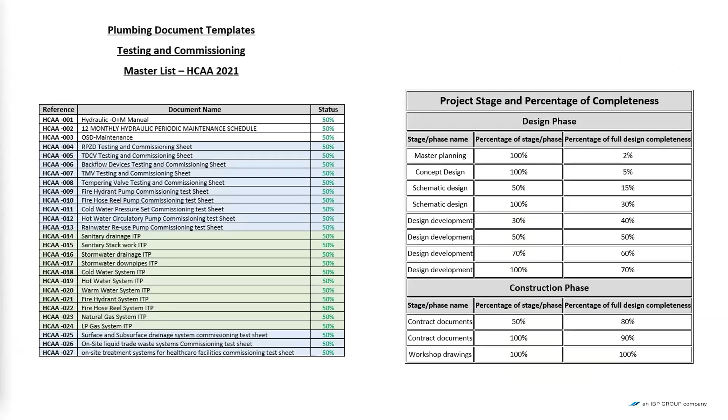We've got our advisory notes that were meant to go out a few weeks ago. We're still making some finishing touches to those, but our big one is the clear outs in apartments, which has been an issue for a lot of different class 2 jobs out there. That's the list of the testing and commissioning documents, and that's a bit of a snapshot for you of what's on the website now.

A reminder of our CPD. Most people know, but you need to have 25 points a year now to maintain your accreditation with the New South Wales government. Attending tonight, you get 2 points. Attending a CPD session on a Tuesday, you get 1 point for the hour, and you can get points for subscribing to the Plumbing Connection. There's a whole series of different ways of getting it, but you have to lodge those points on our website to get them. Other than for tonight's meeting, they automatically get credited to your name by Emily.

Matt Lloyd, are you here tonight, Matt? He is? Over here. Okay, so yeah, we've done a bit of a plug here for Matt.

He's moved from Geberit after 8 years across to Rehau. Just a reminder to anyone else that moves around or has new staff, let us know, and we're happy to introduce them to the room. Matt's obviously been a big player in this space for many years, and he's very much appreciated. If you need Matt's number, it's actually changed - he didn't take his Geberit number with him, he's left that, and he's got a new Rehau number that you can get off him tonight.

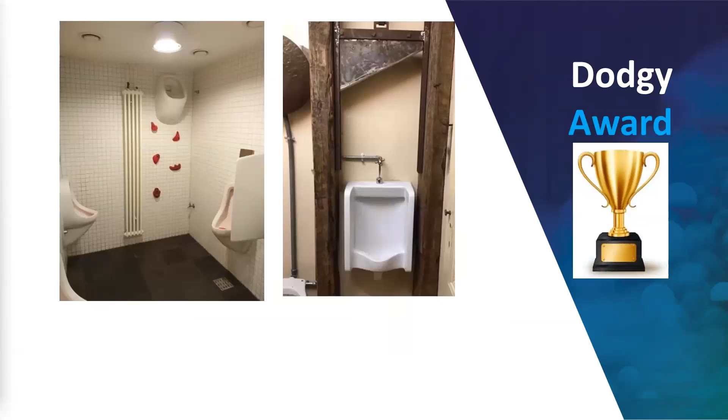So tonight's Dodgy Award goes to Paul Angus for the guillotine urinal and the rock climbing urinal. So Paul, if you want to come out and accept your bottle of wine. You want white or red?

Red. So the dodgy photos have been getting light on, so start sending them through again so we can get some good photos going. We have had some really good ones in the past, and they're good as well - not actually really dodgy, some good stuff. You guys are welcome to send them too. If you see dodgy stuff, flick them in. Just don't tell us who the plumber is.

Okay, so Dave Sablina, I might get you up. I touched on this last meeting, but after 6 years I think in the president role, and now running my own business, I've decided to hand over the baton. I'll be staying on as a director, but we've got someone new, so thanks, Dave.

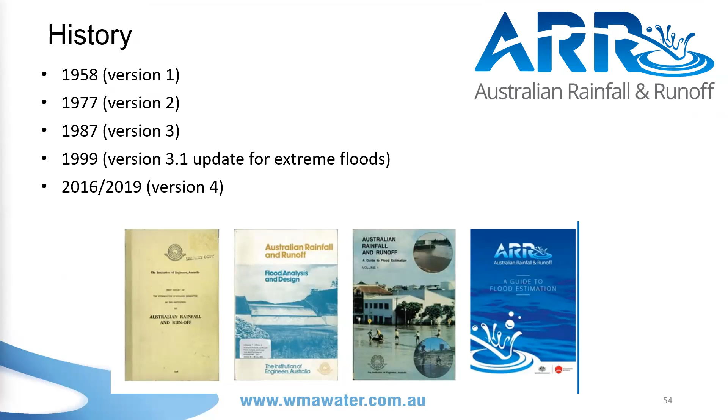It's been going for a very long time, and we updated it in 2016. The previous version was 30 years earlier, and computers were sort of invented and made public in that period. So the leap was a bit of a quantum leap, because we moved from hand calculations. People were doing this in the 50s, and you probably don't need to worry too much about this slide.

Big changes in practice. A lot of stuff changed, but a couple of things stand out. The rainfalls have been significantly updated for climate change. Now, climate change probably hasn't hit your industry yet, but don't worry, it will if you're designing things like roof gutters and other bits and pieces. I wouldn't be surprised if it becomes mandated out of the flood inquiry into the flooding up at Lismore and Woodburn and other places. So that might change a few things, and it'll probably be a bit brutal when it happens.

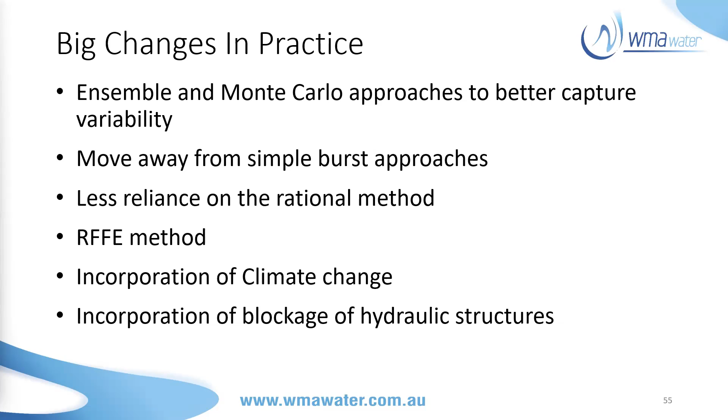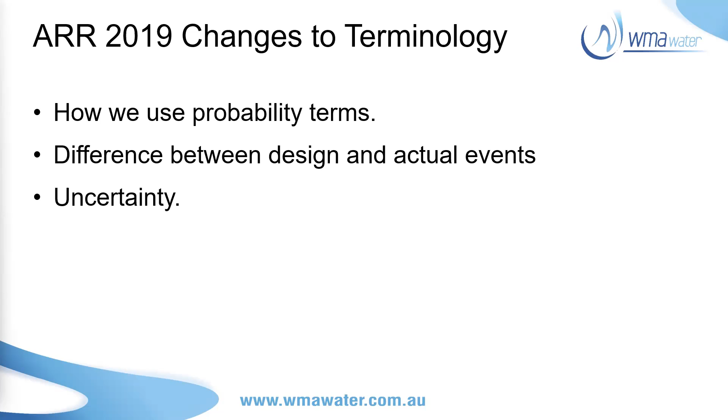One of the other things we changed is probability terms, which is why I guess I'm being invited here. This is an old long-term argument—they were arguing about it in 1987 when I was finishing university and they were writing the previous version. We're also trying to deal with things like uncertainty.

So, probability. People here, I presume, have heard the term ARI, average recurrence interval. Well, I'm sorry, we're going to put that in the bin tonight, and I'm going to hopefully explain why. I'll let you all talk about it amongst yourselves in your industry, but if you talk to other people, I'd really prefer you didn't use that terminology. Hopefully by the end of tonight, you'll believe me.

When we talk about probability, it's all about communicating the risk and what could happen to the public, to politicians—because they're not as smart as the public—and often to decision makers who need things compressed into a pretty small, short format. We want people to understand risk.

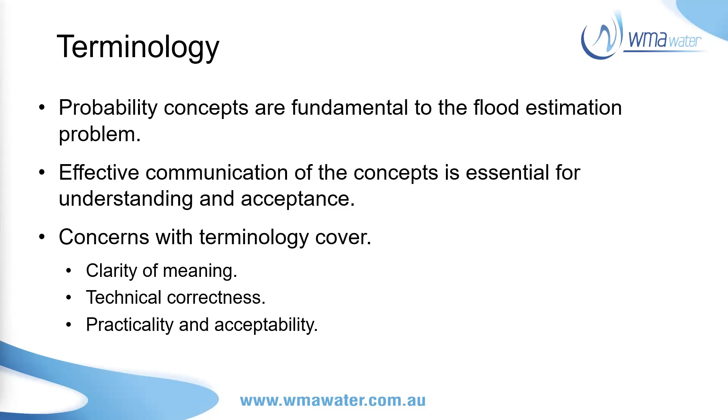The problem is, as people, in terms of managing risk—particularly rare risks—we want to make sure we get paid on a Friday, or we get dinner tonight, or we've got somewhere to go home to live. We're not real good at thinking about what's going to happen in a 1 in 100 year, or 1%, flood—or up at Lismore, it's about a 1 in 500, when water's two stories up in people's houses. People need to understand that.

So in terms of clarity of meaning, which was a big focus, the terms recurrence interval and return period—like a flood has a 10-year return period or a 100-year return period—are really complicated. It's misused, and the media love it, but it doesn't really convey too much about the probability.

Floods and rainfalls—even 5-minute rainfalls or 1-minute rainfalls that would affect a gutter—occur relatively randomly. But what you might have noticed this year, if you've been trying to mow your lawn like me, is that floods and heavy rainfalls are clustered. We go through these periods. This has been a tough year for rainfall, not as tough as other years though—like some years in the 50s, there might be a few people who were born then and might remember it. 74 was pretty bad too. Despite what was on the media, there have been worse years in terms of rainfall.

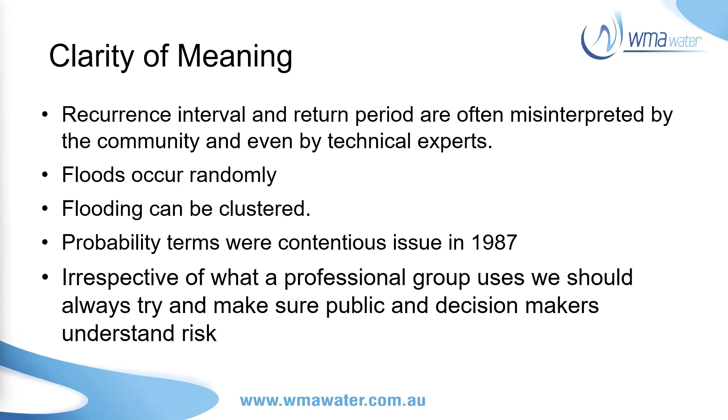But probability has been a contentious issue. Irrespective of what your professional group uses, we really try to make sure that when you communicate these things to the public, you help them understand the risk.

So what we've used in the past, most of the time, is what we call average recurrence interval—that's how long on average, and you need to emphasize 'average', before that happens again. Unfortunately, the average is the important part, and the recurrence interval is the easy part.

These averages are not representative. They work all right in Sydney, but if you're in Brisbane, they don't work at all—particularly if you're looking at something that happens every 3 months. If it's something that happens every 2 years, that's not too bad, but 3 months doesn't work in Brisbane, doesn't work in Melbourne, and sort of works a bit in Sydney.

And it's always misunderstood for large floods as well, or large rainfall events. We had some really big rainfall events in New Zealand, in Auckland, that flooded a huge number of houses. Somebody wrote into the local paper and said, 'We've had a 100-year flood. The best thing the government can do is let people build in the floodplain, build new houses and stimulate the economy, because we won't have another flood for 100 years, and those houses will be worn out by the time the next flood occurs.'

So you can see my point—average recurrence interval doesn't work terribly well if people are going to make decisions on that basis, thinking 'we've had one, we're safe for 100 years.' Well, it actually doesn't work like that at all.

Each year, there's a 1 in 100 chance it'll happen again. Some people win lotto twice. I don't play lotto because I wouldn't win anyway, but most people lose and don't win lotto. So each year you've got a 1 in 100-year chance of something occurring, and that is very different. You roll a dice, you could be lucky, and might not be each year.

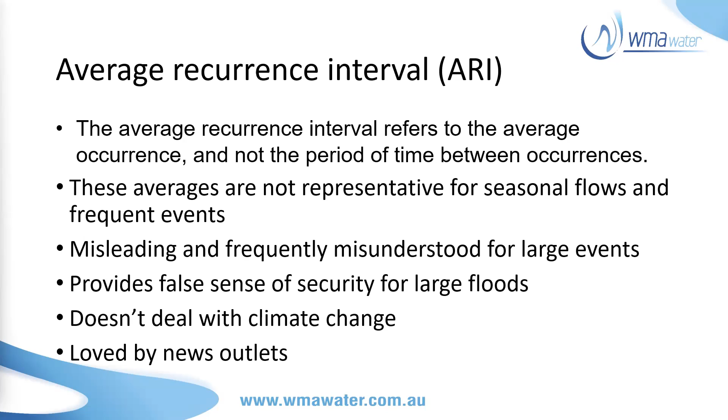So ARI doesn't work very well for a couple of reasons. Annual exceedance probability doesn't flow off the tongue so well, it's not quite so easy. But from a pure statistical term, it's so much easier for us to calculate. And it's really about annualized risk.

So if someone says, what does it mean? It's about betting on a horse race each year. Am I going to win with my 100 to 1 long shot? Or in this case, you wouldn't win, you'd lose because your house might get flooded. Or am I going to not? And so that's how flooding really does work.

It's an annualized risk. And like we've had a big rainfall event in Western Sydney - well, not really big, about 1 in 15, 1 in 20 years at Windsor. I can tell you, if we have a flood now, we've got about a 1 in 4 chance of having another flood as big between now and August because of the way rainfall works.

You can express it as chance per year. You have a 1 in 100 chance per year of this event occurring. And next year, it resets, you're back again, you have another 1 in 100-year chance. You're not safe for 100 years. You can't build houses on the floodplain and hope it's not going to happen for 100 years. It doesn't work like that.

So we've changed that, and I got a lot of grief from my profession, so maybe some of you can add to that. But I'm hoping what I've said makes a little bit of sense, but maybe not if you're looking quite vague.

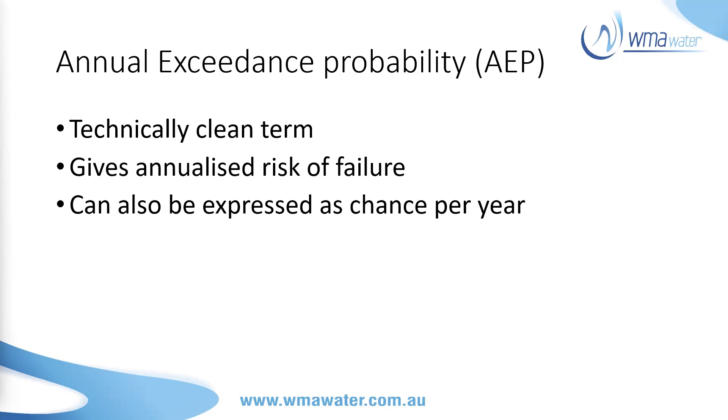So the other thing we've done is for frequent rainfalls, and I presume people use that for other things in your profession, in your groups, like something that happens every 3 months or once a year. So we've changed a few things too. We don't use a 1 year, something that happens every 1 year or every 3 months. If it's 3 months, we'd use the term you get 4 exceedances per year on average, not one every 3 months. And we're going, why are you doing that?

It's because of seasonality. If you design something for a rainfall that occurs every 3 months, I can tell you if you're in Sydney, Melbourne or Brisbane, like something that takes 5 minutes of rainfall to overflow, they'll all happen in summer. They won't happen in winter. Well, some will, but basically bugger all. So it happens every 3 months, but most of them will be in the warm 6 months and none of them basically will be in the cold 6 months. So it's not really 3 months apart. It's like you get 4 a year.

How far apart they are is just an average. It's not what happens. Now, I've probably confused a few of you, but I've got a picture here.

Well, people in my profession are smart, so we've just put a table up, and one of my colleagues at the Bureau calls it the Rosetta Stone. It's in Australian Rainfall and Runoff. And I should say, Australian Rainfall and Runoff is free. You can download it, cut anything out of it, use it, put it in any of your industry documents, do anything you like with it, as long as you say where you nicked it from.

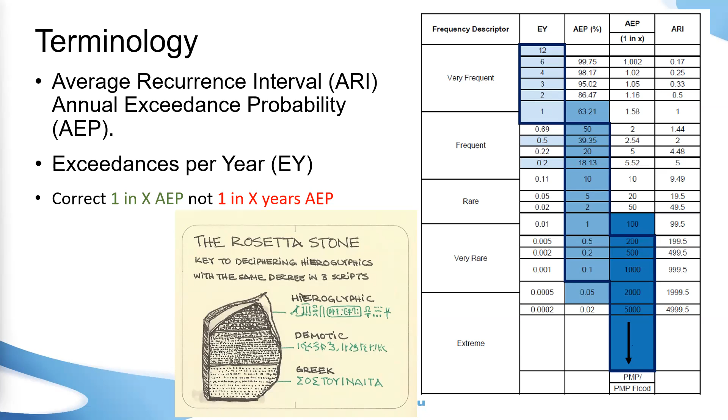Now, in terms of rainfall, for people who are sort of my age or a little bit older, if you're using the old rainfall from the Bureau, when doing things like gutters, that was calculated in 1987. And if you're looking at, say, a 5-minute rainfall or a 6-minute rainfall, back in 1987, we had 14 long-term rain gauges in the whole country, just 14. We had 1 in Sydney and 1 in Newcastle and 1 in Brisbane and 1 in Cairns.

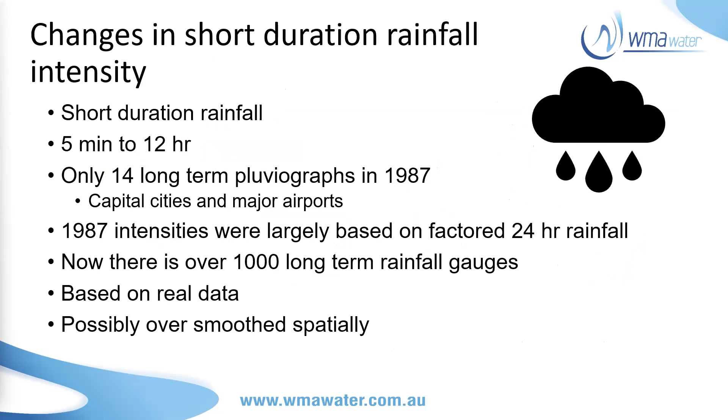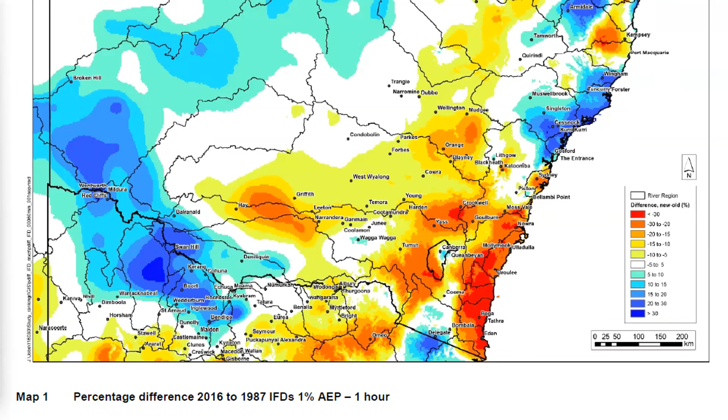You'll see a very similar graph if you looked at 5 minutes. The reason it went red down on the south coast is we didn't have any rain gauges down there, so they just assumed what was happening in Sydney would happen there, and extrapolated all the way down to Victoria.

Now, long-term rainfalls - is that an issue for your practice area? Probably not, they didn't change very much, so we can probably skip that.

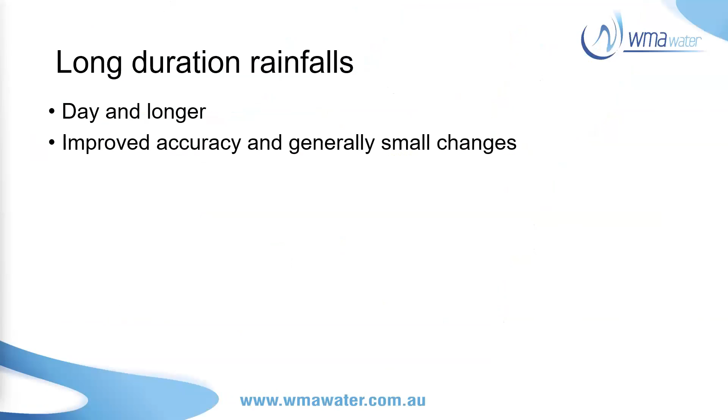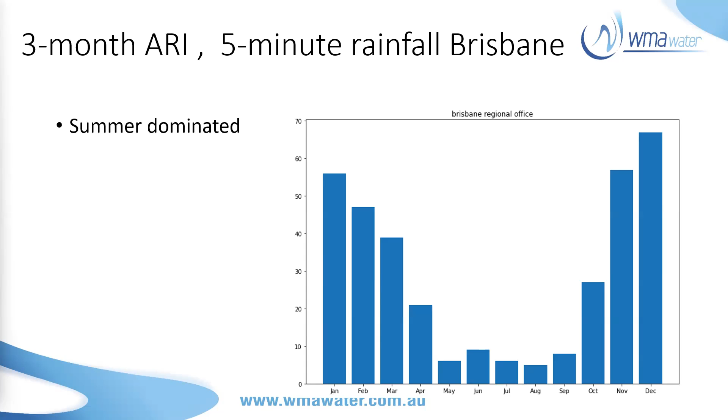We can look at what happened in the wettest year - we didn't get 4 of them every year. This year we got about 9, another year we got 1. So the average is really important - that alone isn't telling you too much.

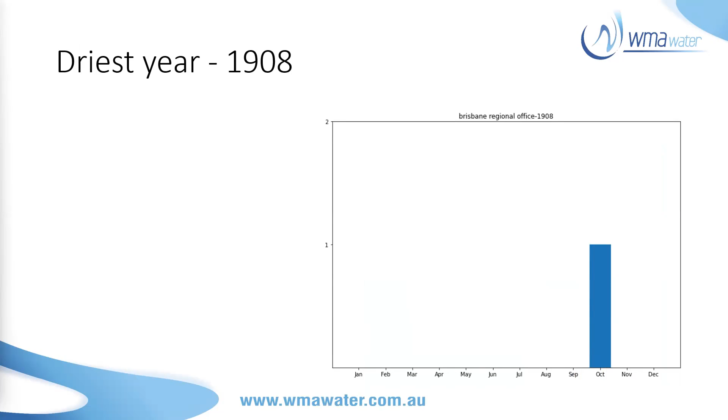In fact, if we look at the time between events, the only interval that's wrong is 3 months. You're more likely to get them at about a month or about 6 months, because you'll probably get 3 or 4 in summer and none in winter. So average recurrence interval is telling you absolutely nothing about the time between events.

Have I lost people on that? No? Nick's looking a bit confused - I might have to quiz him later.

This shows how many events occurred in different years, going back to 1907 to around now. You can see some years had 1, some had 2, some years had 9.

This is how many events you get in a year - some years had 1, some had 2, some had 3. But events per year, you typically get on average 4 a year. So we've replaced ARI, average recurrence interval, with the reverse of that, which is events per year. You normally get 4, but you can see other amounts occur too.

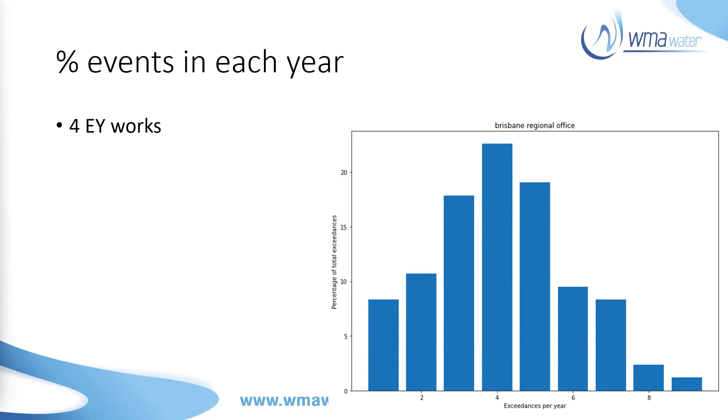And you get the same thing with a 2-year event. But if you're just dealing with a 1 in 100, or a 1% AEP - annual exceedance probability - then it's exactly the same as a 100-year ARI. Just don't tell the media that, because they drive us mad.

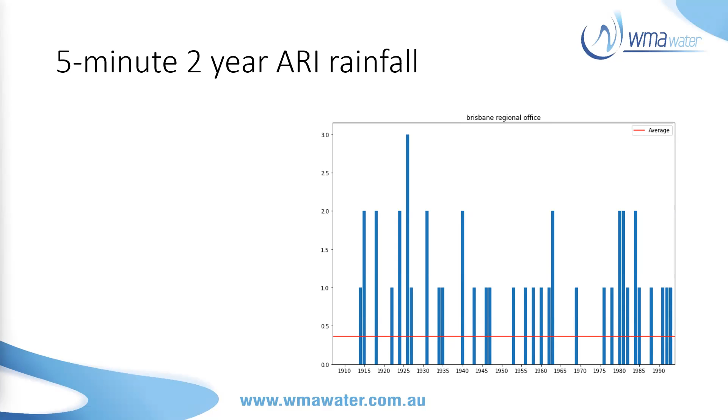In terms of climate change, a lot of people say, I don't believe it, it's not real. In 1987, before I'd even graduated uni, Australian Rainfall and Runoff acknowledged that people were starting to really worry in the meteorological and flood space about climate change and how it would affect our climate. So it's not something that's new.

This time around, we provide some guidance based on a working group with CSIRO, the Bureau, and a couple of universities. What happens with climate change? We're heating the world up. If the atmosphere is warmer, it can hold more moisture, so you can get more rain. That part's pretty simple - when you try to go any further, it goes from very simple to very, very complicated.

But basically, a warmer climate will mean that short duration events, like 5 minutes, will get heavier. And that is what we're seeing in this country.

The other thing we're seeing is that not only will rainfalls get heavier, the really intense part of storms will get more intense, while the lead-up to the storm - where you just get a little dribble - and the bit after the storm will actually get less. So more rainfall will move to the intense part. If you're designing something that has to take a particular rainfall, it's actually going to get harder.

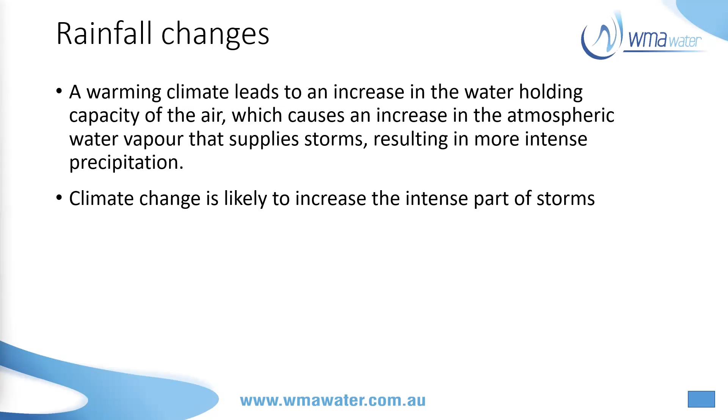In terms of what happens with climate change, we don't know with any great exactness because it's a very complex process, but we've done some work with CSIRO and the Bureau of Meteorology, and we've come up with some percentage increases.

And I don't know if you can read this from down the back, but if we all walk home tonight, we don't catch the car, and you sell your car, or you throw your car away, and you commit to going to net zero about next week, rainfalls by 2090 are going to go up by about 10% anyway.

That's what we call RCP 4.5, representative concentration pathways. So if we stopped making extra CO2 right now, rainfalls are going to go up. If you look at that table, they're going to go up by 4.3% by about 2030, and 2030 is not very far away. So the rainfalls we're using are probably underestimated already because we're in 2022. And if we continue as business as usual, rainfalls are probably going to go up by about 20%. It says 19.7, but it's so inexact, it could be 20, it could be 15, it could be 25.

So these rainfalls that cause havoc, whether it's on a house or a yard or a major river, are going to go up. And the ones that are probably going to go up the most are the ones on a roof or in a backyard because there are no limiting factors. So hopefully I've answered a few questions on rainfall.

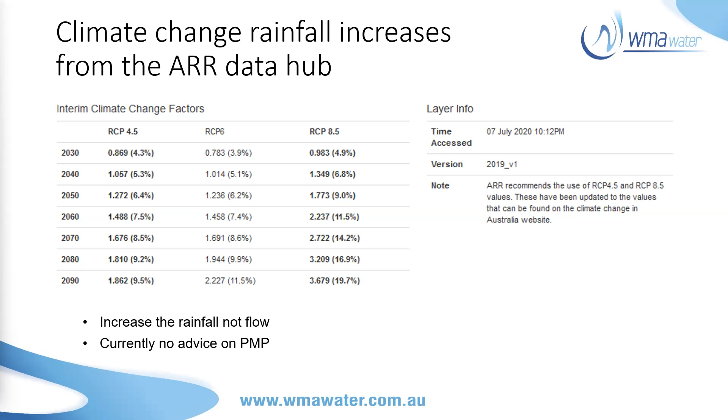Think you're doing this. Yeah. Yeah, the end. Cool, just click that.

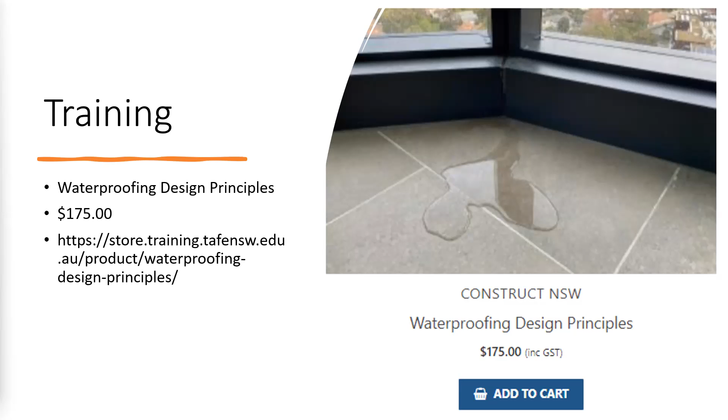Training - there's a really good training course on water shedding put together by Ross Taylor. It's dirt cheap, I'd recommend everybody jump online and buy it for their company or staff, and just run through it, because you'll find that most of the issues when it comes to water shedding - a new term we've come up with, the whole encompassing drainage, waterproofing, and keeping water out of spots it shouldn't get into - training package. So check that out. I've also taken a few slides from it, so you'll hopefully enjoy those. Now, the systemic problem.

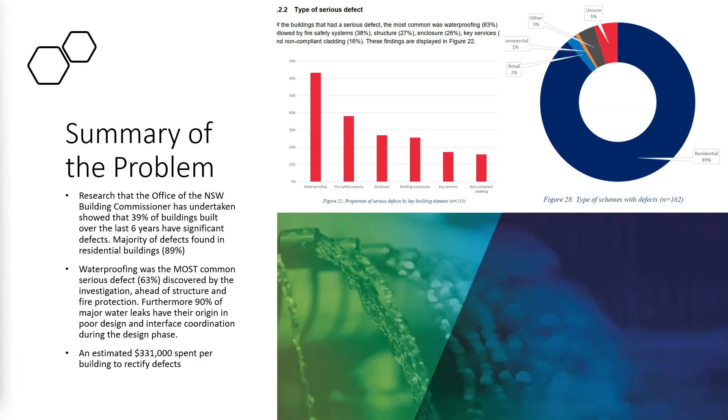We'll start with wet areas. The BCA at the moment talks to floor waste in wet areas. Without picking on the Australian Building Codes Board, there needs to be a little bit of work when it comes to the performance-based requirement and also the deemed to satisfy provision. It doesn't really stipulate any qualifications or metrics that you can measure that against.

Is it the need to drain 2 showers with a single floor waste, or do we need to consider a failed flexi connector in the bathroom? These are some of the discussions we've been having as a working group to determine the viability and reason of having a floor drain within a wet area.

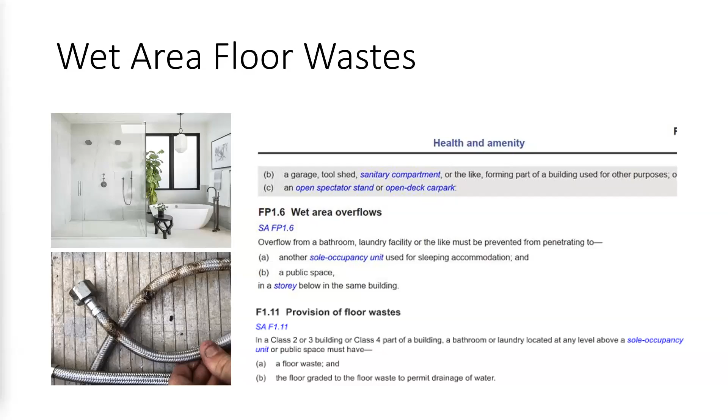Moving on, some of the stuff we've looked at is surface tension, which depends on the roughness of the surface - probably between 2 to 3 millimeters generally. It's quite a factor when it comes to the ability to maintain liquid within a certain enclosed boundary. This is a standard ensuite shower, and I've demonstrated that a standard 1.25% fall sees about 25 millimeters difference between the grate height and the door.

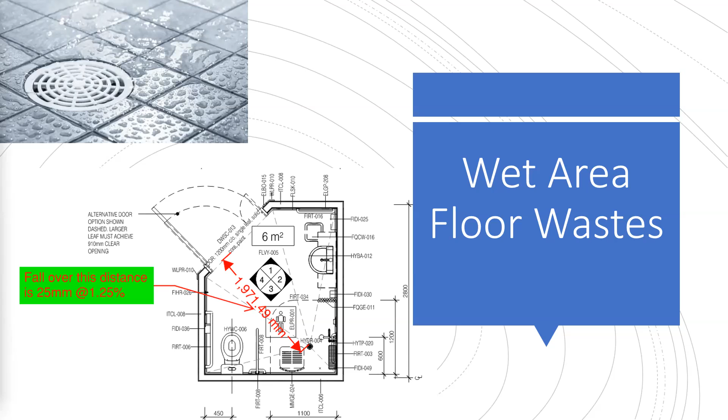We actually exceed the European standard for testing and designing floor waste grates. That would see us with a greater depth than 30 millimeters, which would see water exiting our door at the drop of a hat. So once again, we probably need to think about what we're actually trying to achieve here, how many showers we need to go down the drain.

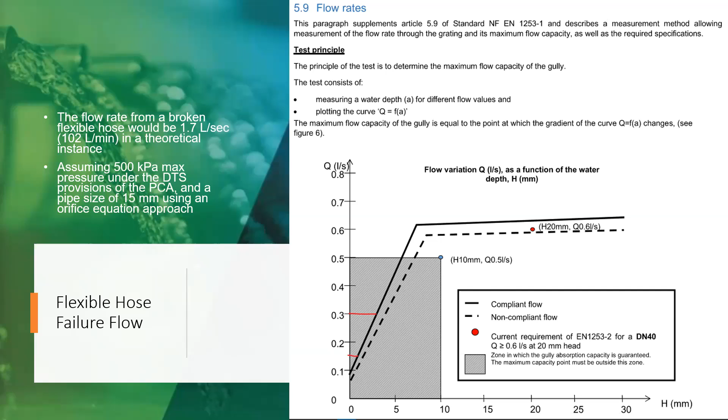In our literature review, we haven't been able to find an Australian standard or guidance that actually tests floor wastes, their grate inlet capacity, and the depth over them, and whether or not that will actually overtop a 900 by 900 millimeter shower. So that's probably out to the jury a little bit at the moment.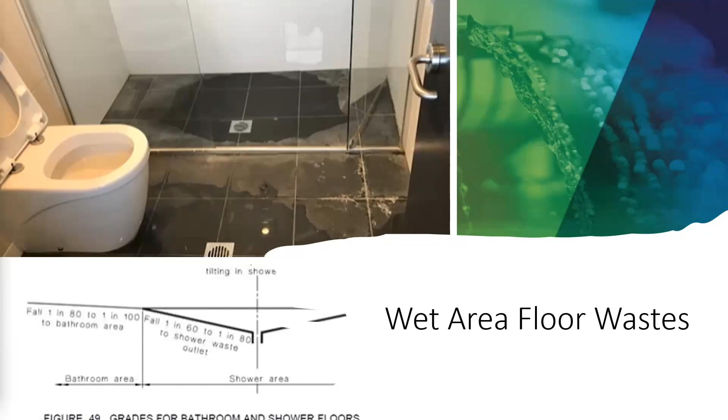It's quite a good example of a situation where somebody thought, oh well, we'll pop the grate close to the door - somebody probably needs to do a bit of cleaning in their bathroom as well. But in this instance, the shower flow was well exceeding the grate capacity, overtopping and using the floor waste within the general wet area quite a bit. So its annual exceedance probability really went over what would reasonably be desired.

There's a little bit of work that might need to be done in this area, which the committee has been producing a guide as to what good looks like. We haven't really stipulated down to the fact that manufacturers probably should start testing in Australia and identifying the depth over their grates that they sell, especially at Bunnings. But I think there needs to be some definition - what should a floor waste do, what shouldn't a floor waste do, and mandate manufacturers to start flow testing.

We need to touch the BCA and update some of their performance-based requirements, and also nominate a practitioner who's going to be responsible for this, because at the moment the floor waste grates are selected generally on look, not necessarily performance - and that's fine so long as the rest of the componentry is designed as such. So the whole intent is to keep the water in the shower, if that's the actual want, and also keep the water in the wet area so as to not breach the performance-based requirement as it is.

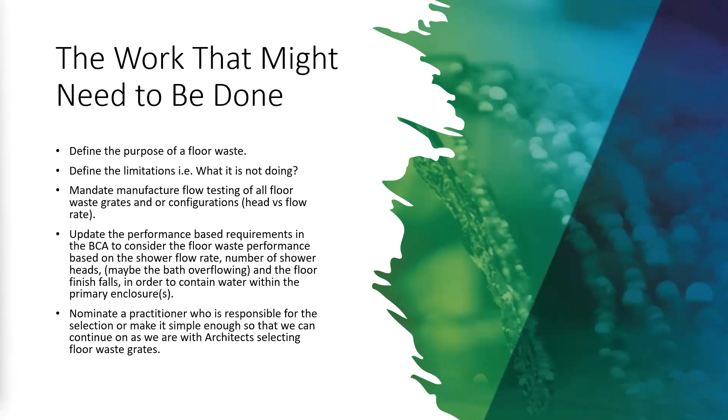We'll move on to rainwater drainage. Rainwater drainage is quite an interesting topic in Class 2 buildings. Balconies are quite a difficult thing to design.

As the BCA moves forward, it's looking at further enabling DDA access, which is a really good move for the industry and people alike. That starts to generate a few problems in the building industry with threshold differences between inside and out, head depths over rainwater outlets, and the like.

Some of the good things the BCA is bringing in is 1.25% falls, or 1 in 80 if you prefer ratios, in structural slabs. That encourages water to move to outlets and takes a realization that a membrane isn't a perfect barrier. A membrane cracks, breaks, and the structure over its 10-year life expectancy moves greater than the membrane's actual tolerance. Getting back to some real basic principles really helps there.

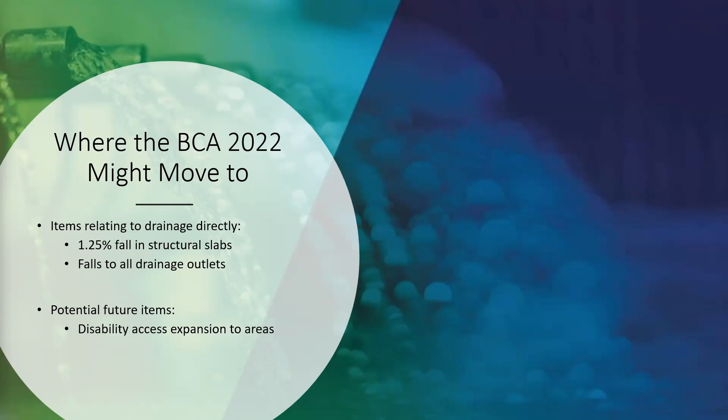Those falls obviously fall to drainage outlets. At the moment, the work we're doing, we're not discriminating between the two, but I think eventually when it filters down to the deemed-to-satisfy provisions, yes, there should be.

At the moment, our BCA as it is really general, which is good because it obviously covers generally every instance. But at the same time, it points us to a deemed-to-satisfy provision that doesn't necessarily satisfy every instance. In the new 2022, under that deemed-to-satisfy provision, there's now a note saying we recognize we don't satisfy every single instance, and if you're sitting outside of those instances, engage somebody to undertake a performance-based solution.

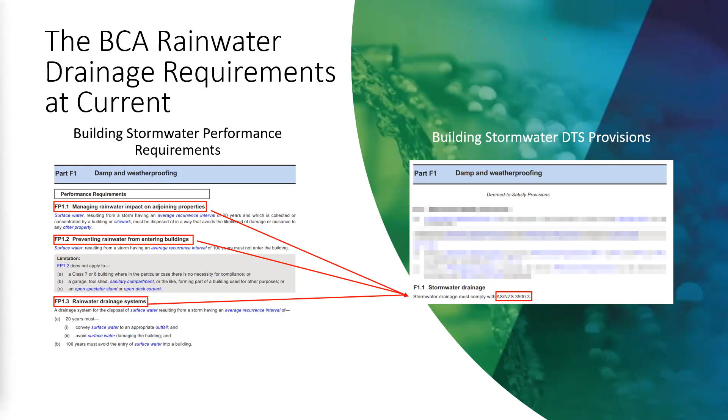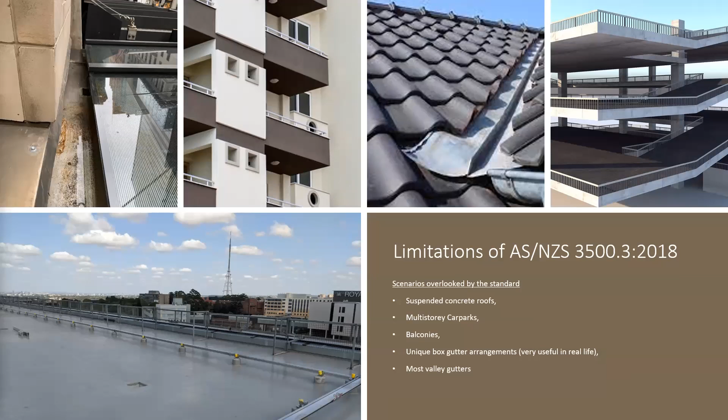Some of the stuff that AS/NZS 3500.3 does do, I won't read those out because we all know what they do, and we might talk about some of the things that they don't do. They don't really do balconies very well, they don't really do concrete roofs very well, very limited when it comes to valley gutters, and they don't really talk about multi-story car parks. I won't go on because I've got a limited amount of time.

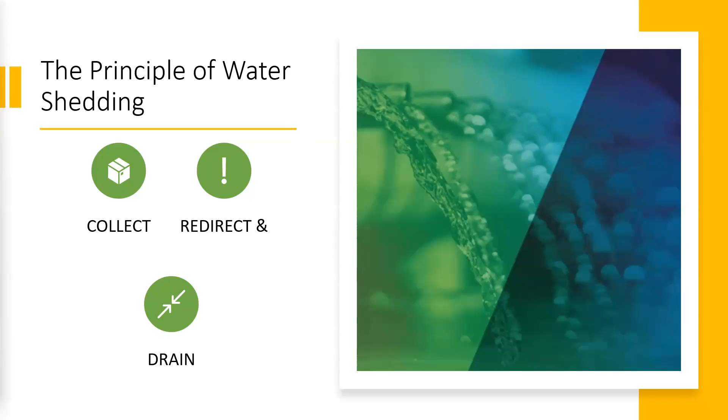The principles of watershedding - this is really what I was supposed to talk about, but I'm going to talk about a lot of other stuff. Realistically, you've got to collect, redirect, and drain. Look at what's falling from the sky, redirect it with the concrete falls with your structural engineer friends, and then drain it in the drainage system and ensure that that's adequate.

In addition, use gravity, keep it simple, and design for failure. That's probably a new term I've started using with the building commissioner at the moment, because we've talked about fail safes over the years and overflows. I think we need to change our language to go, we need to understand that things do break, things do fail, and therefore we have redundancy to ensure that our building doesn't flood.

When we go back to the BCA performance requirements, it says don't let a 1% storm into the building, so we need to design to fail. This principle has been around for a long time - there are some really good old books of architecture, and when we jokingly look back, they recommend for drainage of water a 1 in 79 grade, approximately 1.26%, and we've sort of fallen back on that only a few years later.

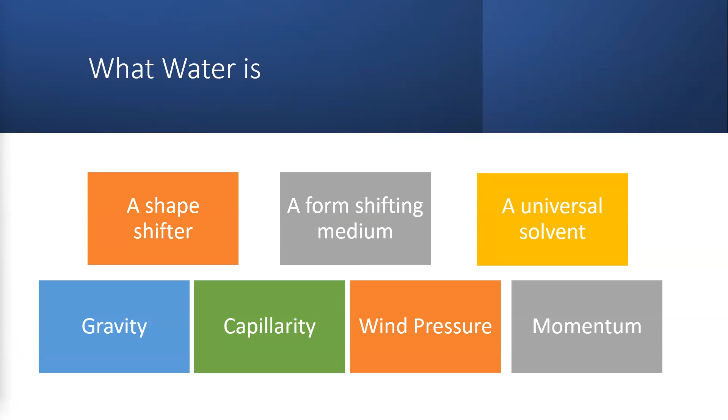What is water? Water's a bit of a beast. It's a shapeshifter, it shifts between mediums. It's a universal solvent, so don't let it get to the nuts and bolts because eventually they'll leave. It complies with gravity, capillary action, it's subject to wind pressure and the like. So it really is an interesting object that nobody can necessarily predict in every instance.

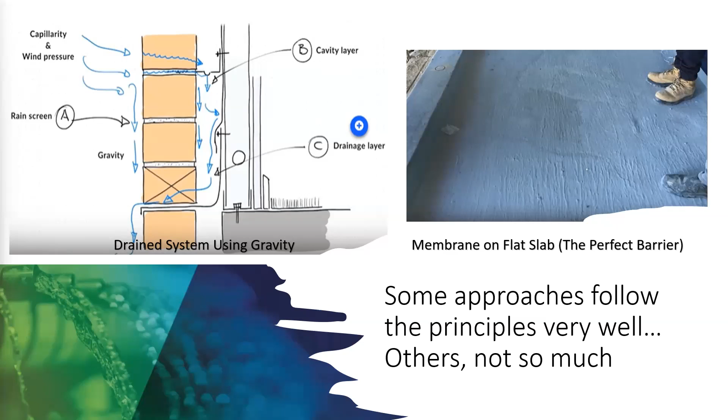So, right, wrong, it depends.

These are some interesting observations we've made through our literature review, some things we've looked at. One of the interesting things is 70% pipe fullness. A lot of international standards refer to 70% pipe fullness, and that's to avoid this situation, which from time to time you'll actually see.

So this is an instance where free surface flow, which is flow that sees both air and water mixed together quite nicely, ends up seeing just water within the pipework. And as we all know, water takes the path of least resistance, and from time to time it will bubble out an outlet. There are two instances within these videos that are easily observable that demonstrate that.

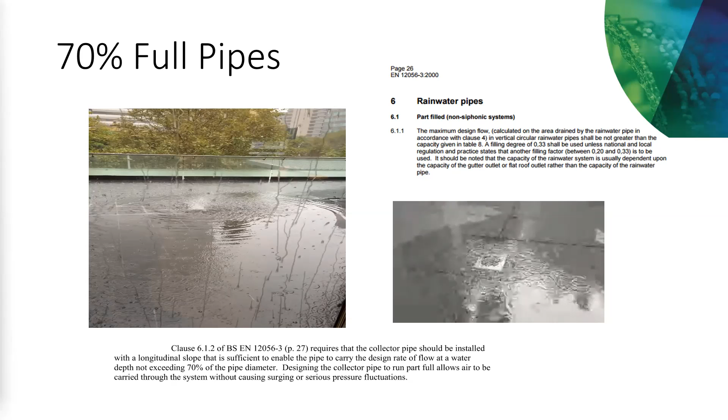So this is something the Australian market should start to think about. At the moment, our deemed-to-satisfy provisions don't refer to suspended structures. So maybe the civil engineering guidance we have at the moment, pit to pit, where a pit provides venting ability, might not necessarily be the best approach when it comes to horizontal drainage or suspended structures, and also the vertical. This is out of EN 12056.3, and also the DIN standard picks it up, and the Singaporean standard. So something to think about in design work.

Realistically, a lot of this is caused by uniform and non-uniform flows. When you have a nice uniform flow, you have an equal amount of water going down both pipes and therefore equal pressure, and therefore you're unlikely to see water bubble out of your traps.

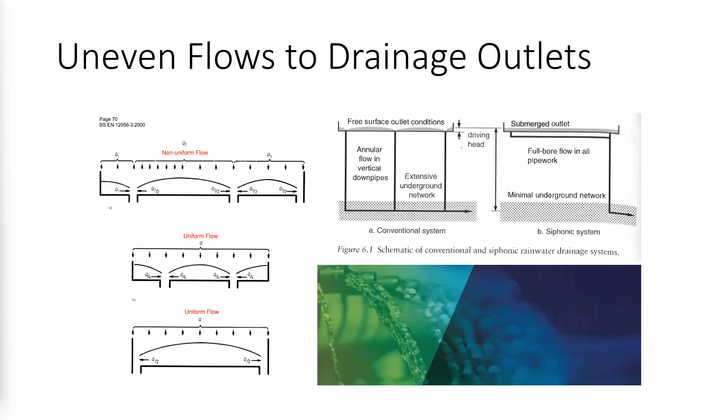But when we look at what a traditional conventional system looks like, you end up with air entering, so you get annular flow, with a swirl effect around the outside of the pipe - hence your air entering the system. When you end up with a submerged outlet, you get a full bore pipe, and between the two, you end up with an oscillating flow. So it's actually pretty good.

I just need to keep pressing that rather than clicking. So if I fast forward this video - we did some work with some test rigs - I can't fast forward this video, so I've got to talk for 4 minutes while it plays.

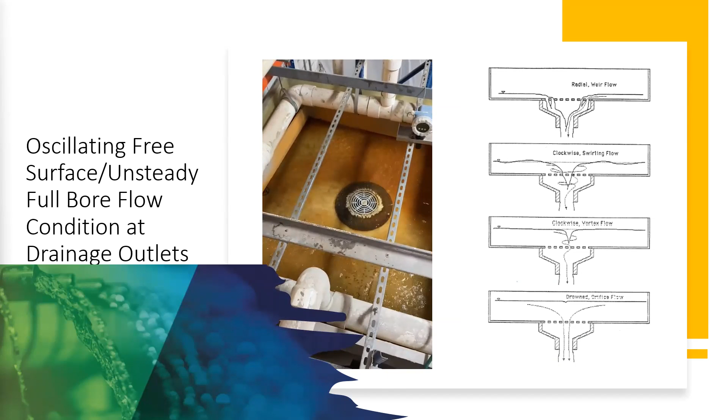So this test rig, we were looking at testing the flow capacity of floor waste, but we started with a rainwater outlet just to observe the differing states of flow between weir flow, which it is at the moment, which is water entering the grate without the grate being drowned.

And then the grate moves between weir and orifice, oscillating between the two, which actually blocks off your air, and you end up in a siphonic action for a small period of time before it drops off. This is the fault that can blow out floor drains further down the building. So a bit of a difficult one.

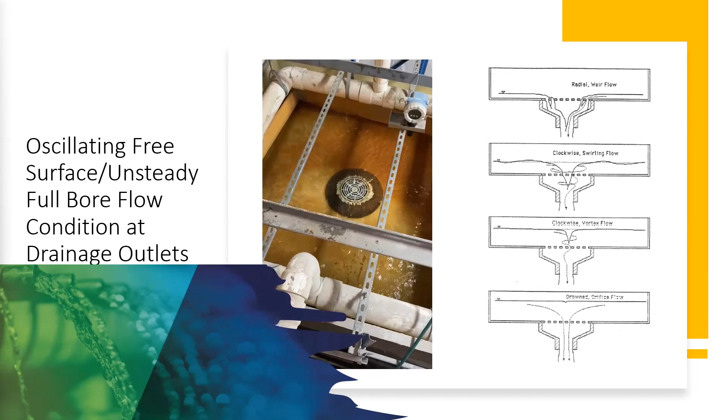What's also observable, on my next slide if we ever get to it - yeah, you can start to see it oscillate here, where you see it jump up and down. It's gone back into weir.

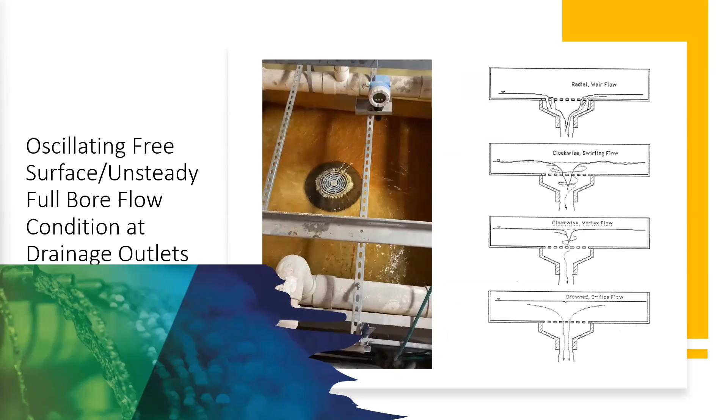Anyway, we'll jump on. There are some really nice terms when it comes to the different sorts of swirl effects, which was well defined by Beecham and O'Loughlin back in the day at UTS.

So if we look a bit more at why things go into full flow and how we probably want to avoid that - a lot of it is small pipes and reducers in pipes, which cause hydraulic jumps, which then cause the potential downstream pipework to start flowing full. So when we look back at a Class 2 building and we have a lot of 50 mil pipes cast into slabs, it ends up being an interesting situation, hence the bubbling floor grates.

The bottom item identifies a standard 50 mil diameter pipe, standard balcony. Under full flow, if you use Manning's calculation, you're probably at 2-odd liters per second. If you're running 70% full, you reduce that to 0.66. So that's quite a dramatic capacity reduction compared to maybe what might be standard practice.

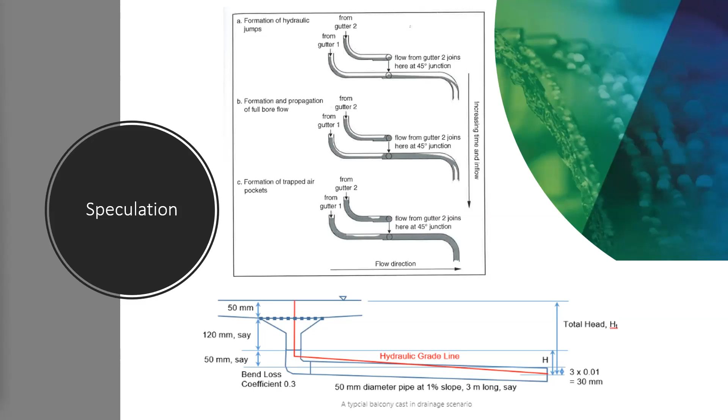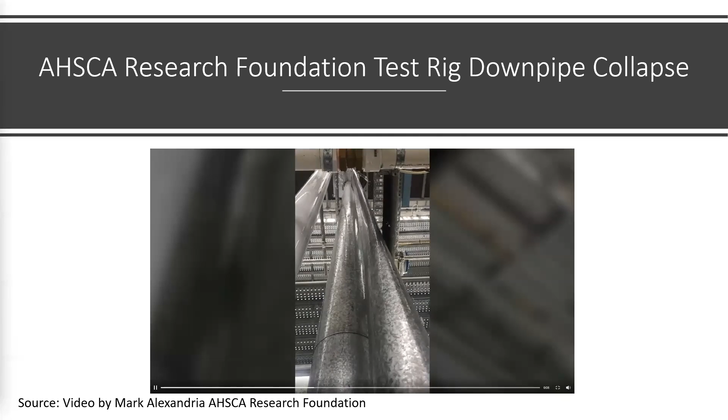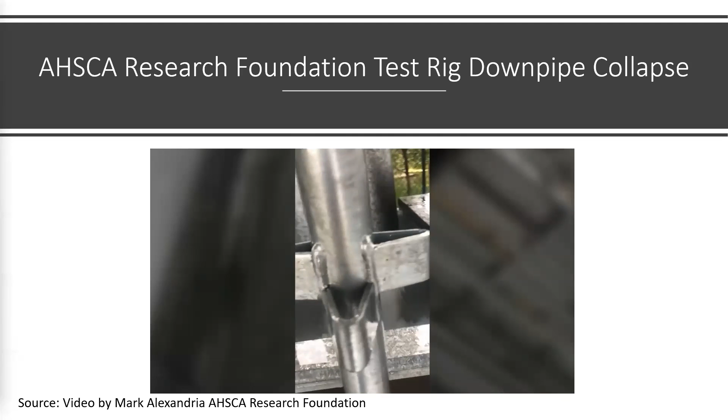I borrowed some slides from Mark Alexandria and the AHSCA Research Foundation. This is a metallic downpipe that ran full and ended up in negative pressure. If you look at the metal, it's no longer cylindrical - you can see the effects of the negative pressure. Quite an interesting effect.

Jump onto suspended pavers. We did a lot of work on this with two of our colleagues, Fernando and Dr. Jeff O'Loughlin. Suspended pavers are something that will move into designs more often to assist with compliance with the new DDA requirements. This is surface tension on suspended pavers - as it turns out, there's about 3 millimeters of surface tension that generally sits on a suspended paver, which needs to be considered when determining set downs.

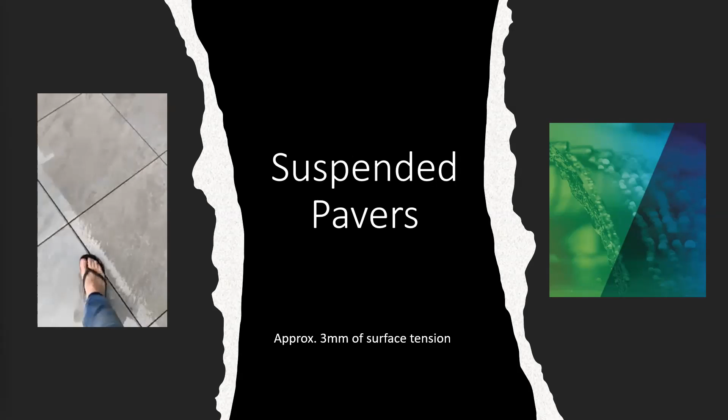This led us to a fairly large spreadsheet where we ended up being able to fairly accurately determine the flow depth to enter one of the 3 millimeter cracks between pavers.

Some of the best arrangements were 600 by 600 paver formats, with a 3 millimeter gap between the pavers as a fail-safe, and 10 millimeters around the perimeter - except for the door, where you probably don't want your high heel to go down between that. Be careful of small areas with large format pavers because they don't have great inlet capacity. And if you have something flowing over onto the Juliet balcony, you've got a lot of splashback and a lot of water likely to enter the building.

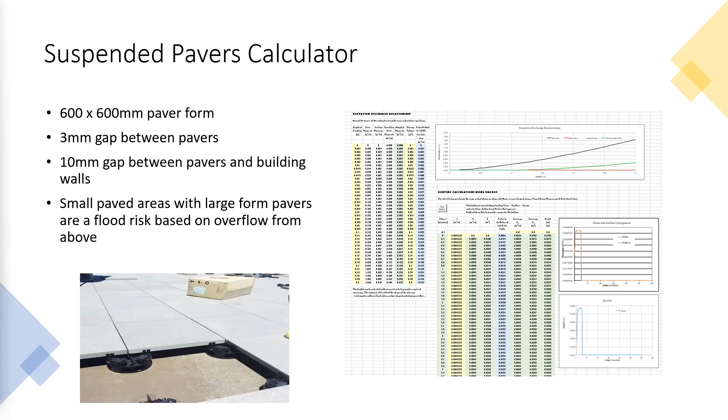Kindly enough, one of the paver manufacturers had some good test data from a French testing laboratory - you can see some of our testing top right there. So we checked some of the standard formulas. The one that really races up is the Weir calculation, so it's not necessarily applicable.

There's Bernoulli's theoretical estimate, which was very hard to actually replicate. The brown line is the measured data, and an orifice flow with no contraction - where you normally end up with 0.6 - is the line that almost fits for most, except down the bottom and the top. With a contraction, 0.6 was very conservative. So you've got an idea of what you might be able to use in practice.

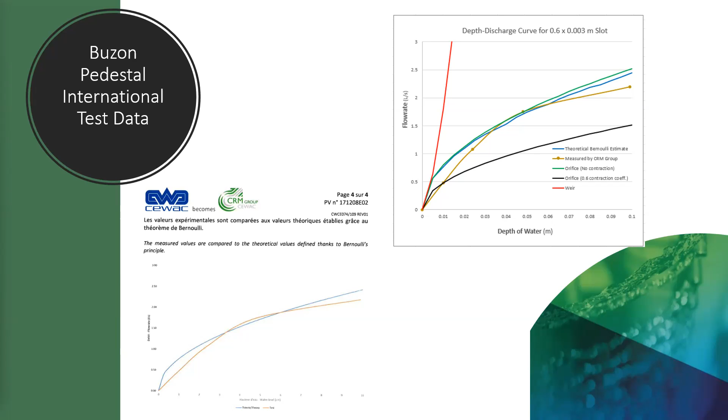Deflection and hogging - this is something that the course TAFE is offering online really brings to light. Deflection and hogging occurs over the 10-year life of a structure, or that's the majority of it, with a good proportion happening within the first 18 months, and the remainder over a 6-year period.

The top left photo is a balcony example where the deflection actually was 138 millimeters, which is huge. That caused all that ponding based on the designer's original positioning of the outlet.

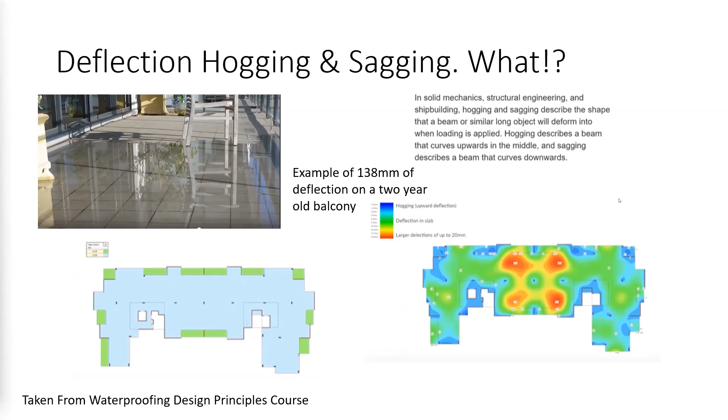Bottom left is just a simple diagram of a residential building, and over here is the hogging and sagging diagram. The dark colors are the downs and the blue colors are the ups. If you look at where the ups are, they're always along the columns and any load-bearing walls.

If you look at where a Class 2 building normally positions its outlets, it's on that top diagram against the load-bearing wall. So this is the mathematical outcome for this building: 15 plus 4 equals 19 millimeters. So where you actually started 10 years ago, your outlet is therefore 19 millimeters higher, because the rest of the slab sagged, or hogged a little bit as well, than where you wanted to be.

If we look at the bottom diagram, that's where you need to be. Part of the principle we're trying to get across as to what good looks like is: chat to the structural engineer - they're the primary waterproofer. That's why the BCA is starting to bring in 1 in 80 or 1.25% falls to floor waste in the structural slab, to try and mitigate some of the risk of hogging. If you need to be at the high point, consider the hogging and fall the slab a little bit more.

Back to design to fail - design to fail in conjunction with the structural engineer. This is some of the work as to what the good guide might look like, where determination of the top water level is very important, as is determination of the overflow position and the top water level in conjunction with that. Trying to keep water out of the building is the key initiative.

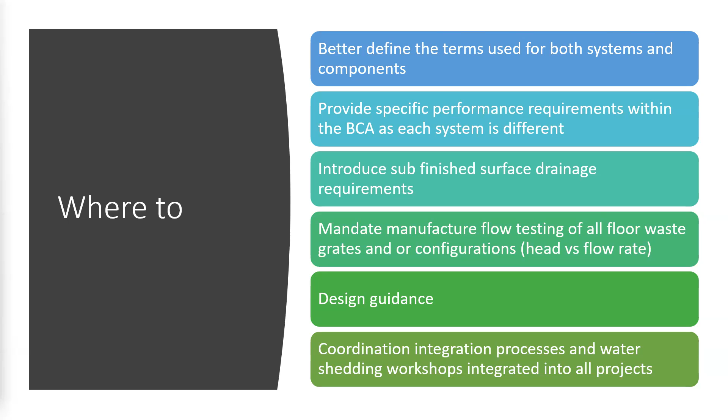And I sort of started with this, but coordination and integration with the other designers on the project, and understanding what they do - understanding what an engineer in plumbing and an engineer in drainage and a designer in plumbing and drainage actually does.

So before we finish, we've got two more slides to go. Sub-finished surface drainage - this is really a systemic problem that we've seen a lot of. Unfortunately, trench drains are probably one of the root causes, where the membrane sits lower than the actual outlet, and there's no continuity between a lower drainage layer, subsurface, and an upper drainage layer.

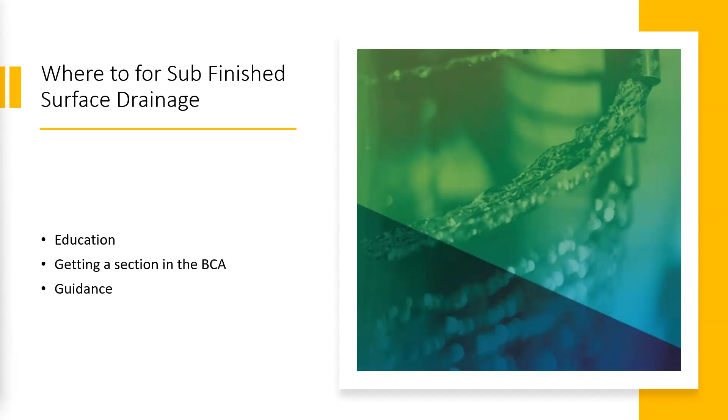Getting a section in the BCA - it's a real nuisance when it goes wrong, and it's very difficult to fix. And then some guidance around what to do, because at the moment the Australian standard is very, very silent on this topic.

Finally, before I shut up, spreaders and metal deck roofs. This is an interesting one that just happened to crop up, but there's a limited capacity that a pan in a metal deck roof will actually take. The designer obviously needs to be careful not to overwhelm that pan, or water actually enters the building. According to the manufacturer, that pan carries 2.7 litres per second, and we all go, whoa, that's not a lot before you overwhelm it and end up with water entering the underside of the sheet. This isn't something we'll be touching on in our working group, but just something we stumbled over that I thought you guys might be interested in.

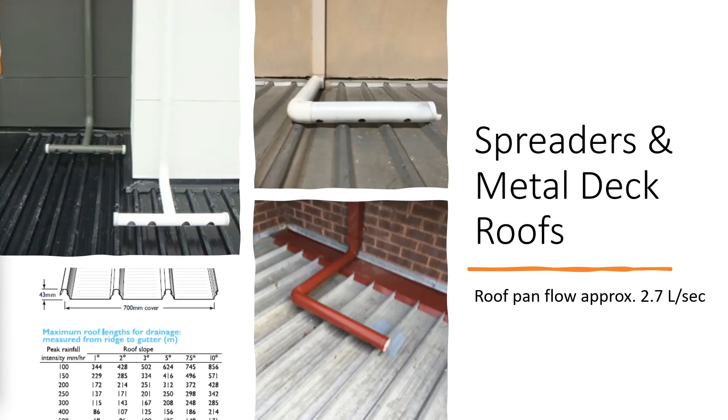Thanks, Tom. Stand there, question time. 17 minutes, Tom told me. That wasn't 17 minutes. You didn't reference any DIN standards there, mate. No, I should have given some reference. Talking to the microphone, Tom.

And great work to the people who've done research so far. I should have mentioned them up front, and I won't necessarily mention them all now, but it's been quite an eye-opening experience. A real big thank you to Dr. Jeff O'Loughlin, who has been a colleague up until he retired recently from the company I work with. He's been a good old grey-haired friend who has really driven a lot of the stuff in the industry in the background, and hopefully we as an organisation and an industry can pick a lot of that up, along with things Mark and his colleagues have done.

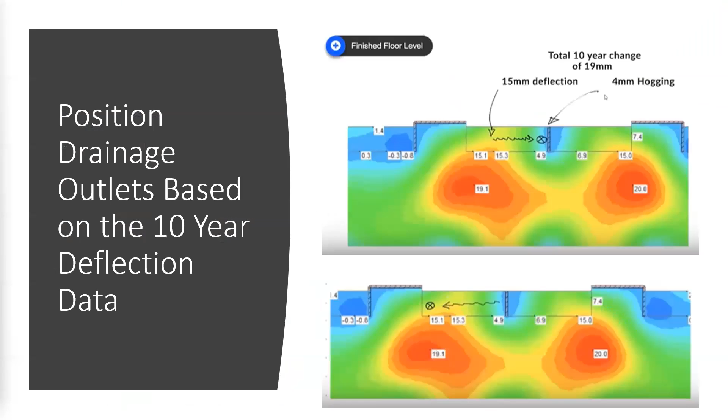You had a section there of a slab that showed the falls, but you didn't nominate a step down. We have this eternal challenge with the architect, builder and client on what that set down should be from the internal floor level. I think you had a graphic there suggesting 1.25% - we work on 1%, and that's hard enough to get across the line. It'd be great if it ends up regulated, because then we can just say that's what you have to do. But that step down in the slab is going to get even bigger, and that compromises the floor to floor height - there's a lot of knock-on effects.

But we have a lot of struggle telling the architect that we need 50 to 80 mil fall to get to that outlet, plus you've got to have your overflow. I assume everyone in this room that's a hydraulic consultant has the same arguments day to day. I think that's one of the bigger issues - educating them on what's going to go wrong when it fails - and hopefully the training package does that as well.

We've talked to the Institute of Architects and they're actually taking that on board. So if you want to be registered with the Institute of Architects, you actually have to have covered and completed the watershedding drainage package. It's a good step to start getting people there.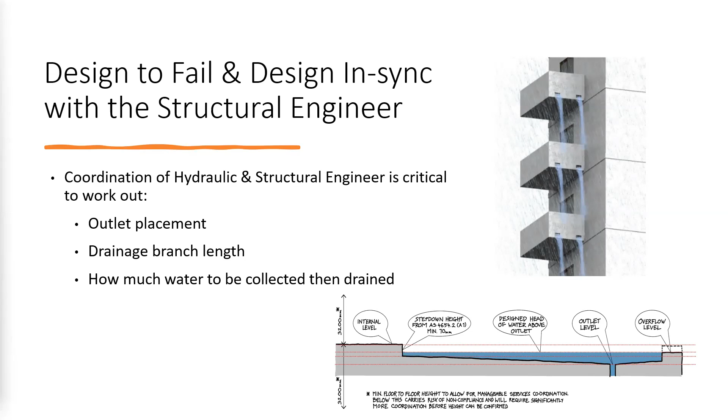Oh yeah, this one here - we've seen it. We could all. We've all drunk at that building before. It's well renowned, very, very well renowned. If you haven't been there, you haven't been a tourist in Sydney.